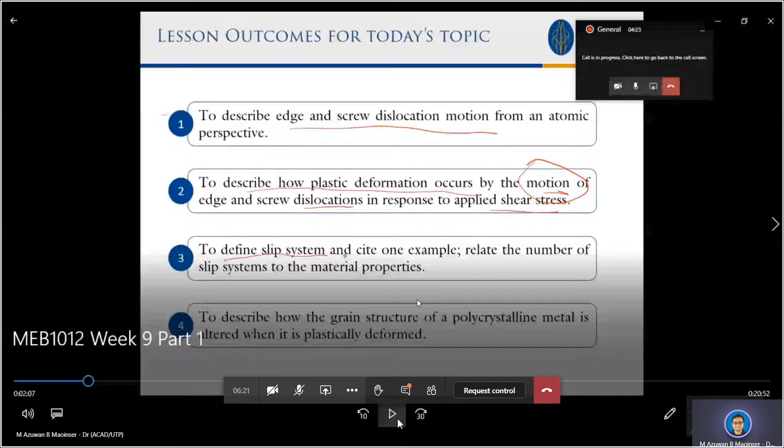Alright, okay, thank you Doctor. I hope to achieve by the end of this slide, the end of this slot basically.

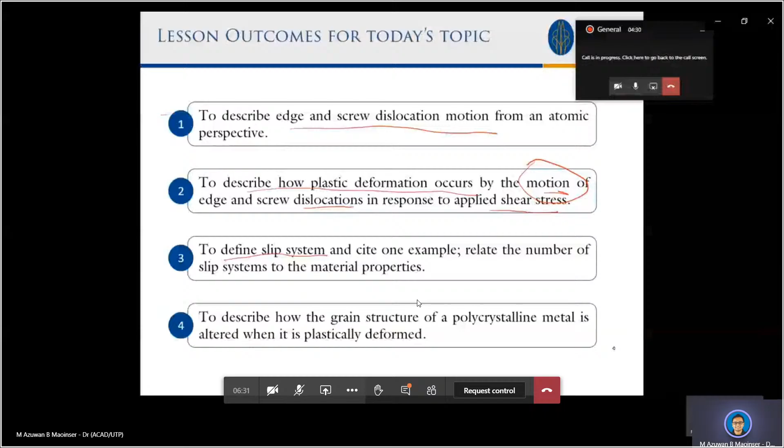Over here what I want to show you is how dislocations affect the tensile strength of metals, because we need to understand how metals deform.

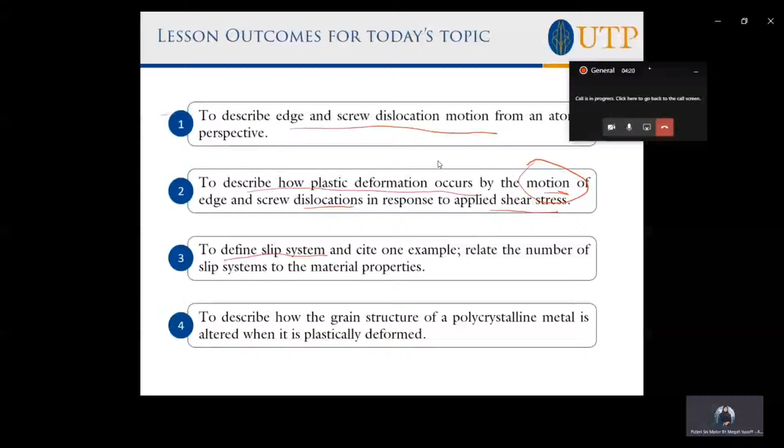Before I proceed, let me recap the expectations for today's slot. This chapter is quite big, but in this slot I'd like to touch on three things: edge and screw dislocation motion from an atomic perspective, describing how plastic deformation occurs by the motion of dislocations in response to applied shear stress—the key word here is motion—and then slip systems: what they are, what they consist of, with examples relating to material properties. Those are the three outcomes I hope to achieve by the end of this slot.

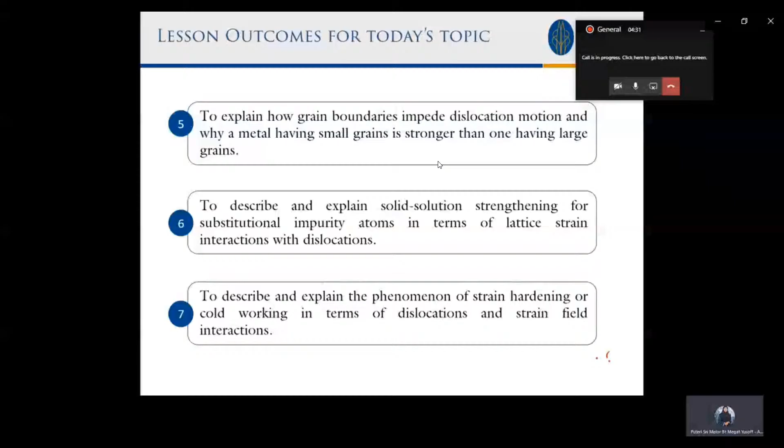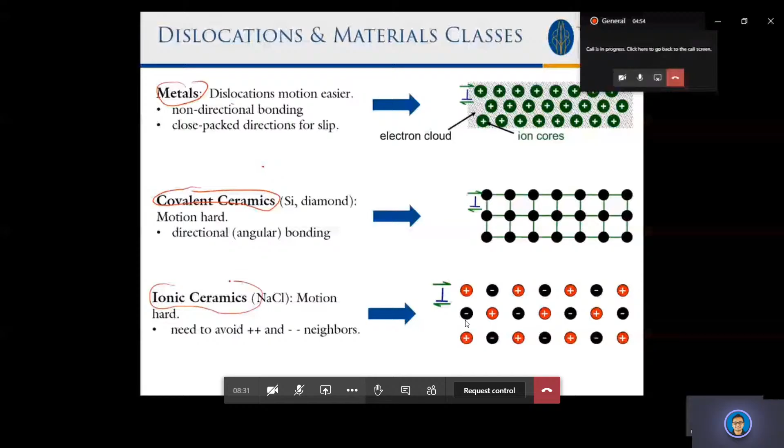Now what I want to show you is how dislocations move in metals compared to covalent ceramics and ionic ceramics. You know metals bond by metallic bonding, and this bonding is non-directional—there's no restriction to where the nucleus sits or where the electron cloud sits. Basically they are free flowing inside the material.

For covalent ceramics, things bonded covalently, you know covalent bonding is directional. The arrangement of atoms, how they sit with respect to each other, depends on how many atoms are sharing electrons with the material. So covalent bonding is directional—there's an angular direction for how the molecules can arrange themselves.

For ionic materials, the condition is that you have different charges, so you need to maintain charge neutrality, otherwise your material will be charged. If it's a neutral material, then whatever you do to it, it has to maintain that neutrality.

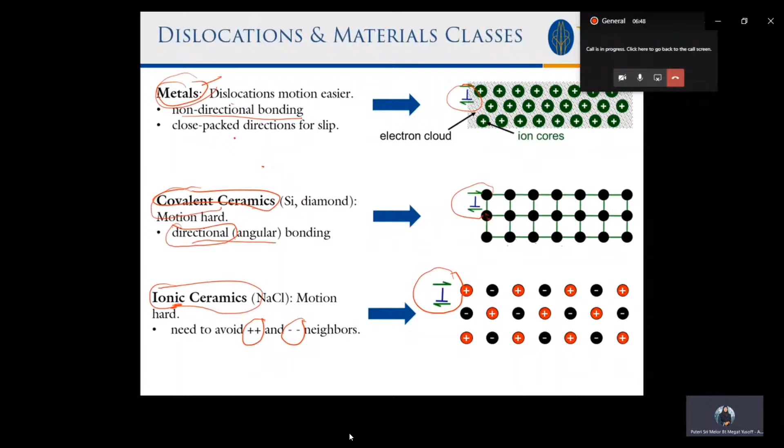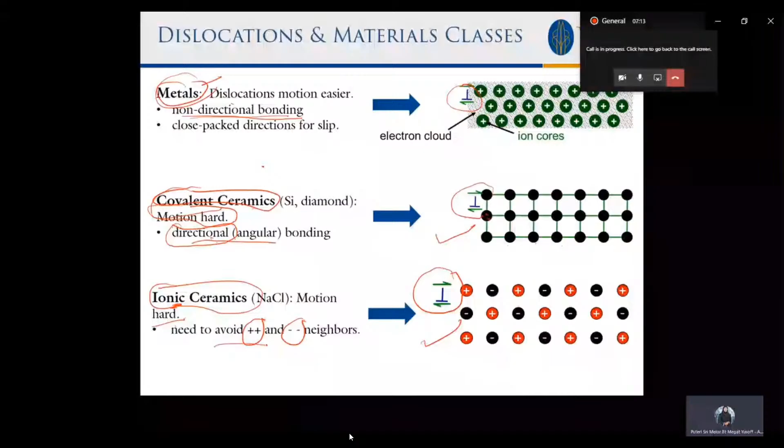For dislocation motion, your edge dislocation and screw dislocation can move—you already know this from chapter 4. The movement is much easier in metals because there are no restrictions on bonding, no direction, no charges to maintain neutrality. But the motion is harder in covalently bonded and ionically bonded materials due to the nature of the bonding—either directional or due to charges. So this affects the motion of your dislocation.

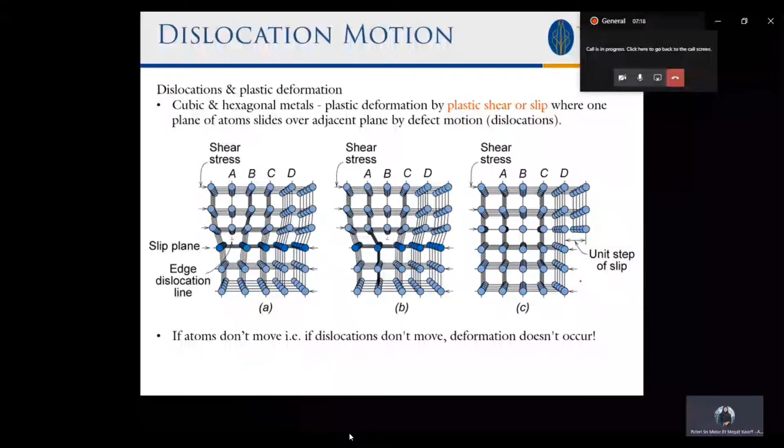Let me illustrate how the movement of an edge dislocation occurs. You have an edge dislocation here at location A, and with the application of shear stress—on one side pointing to the right, on the bottom side pointing to the left—this stress causes the edge dislocation to move one atomic spacing to location B.

What happened is that these bonds are broken and they bond to the new set of half planes there, so that it becomes connected. You see, the bottom part now connected to the upper part of A, and the edge dislocation has moved position to location B. This process continues on, whereby bonds will be broken and will form new bonds with this new edge dislocation. So now it's connected to this bottom one, and this will continue propagating, breaking the next bonds, until the end, when your extra half plane ends at the end of your crystalline block. So this is how dislocations move.

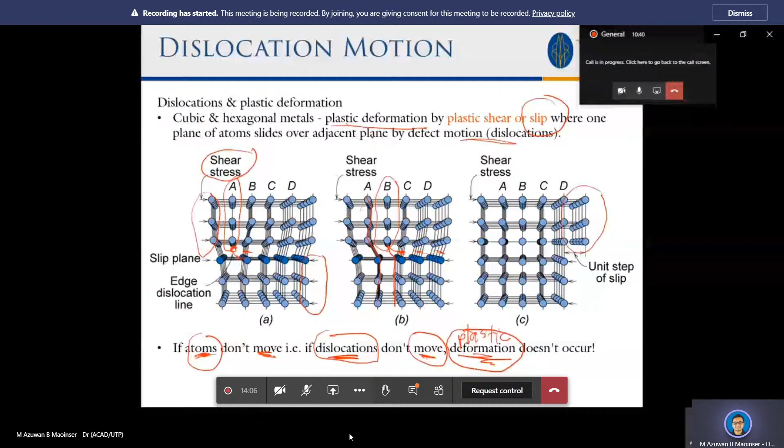Here it shows, in schematic manner, a different view about the dislocation motion. Once the dislocation moves, you must see that the movement takes place over a slip plane, over some plane, and in some direction. So we call this slip plane and slip direction. Together they form what we call a slip system. What is a slip system? A slip system consists of a slip plane and slip direction. The slip plane is the plane over which the slip happens, or the movement of the dislocation happens. And the slip direction is the direction over which the dislocation moves.

So let's see what happened in edge dislocation. You have this extra half plane on top. There's no extra half plane below, right? It's not connected to the atom below. So you've got edge dislocation here, and the direction is shown here. The shear stress is applied, one in the right direction and this one in the left direction. So if you imagine pulling this block in two opposite directions, you're only going to cause this edge dislocation to move.

What happened is it will just move in that direction, and at the end of it you're going to have a new shape of your block. Now you've got an extra part over there. Initially, there's nothing here, and now it comes out at the end. So this is permanent deformation.

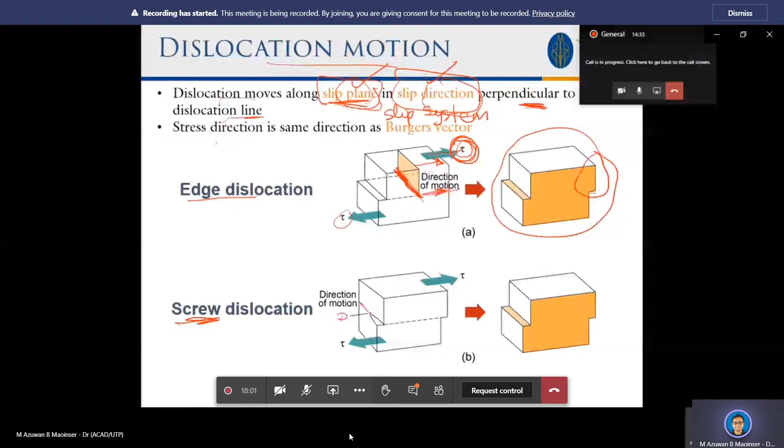But it's a little bit different in screw dislocation. This is where you have your screw dislocation, with a displacement of the atoms, as shown here. But when you apply your shear stress, what happens is you can imagine this going to tear to the back.

It's going to tear off until the back, right? So at the end of it, you're going to have one step like this in the crystalline structure, in the crystalline block. You got permanent deformation over here.

So in this case, what happened is that the dislocation line, where is the dislocation line? The dislocation line extends here. Remember your screw, the screw dislocation. Along this line, all the atoms are misaligned. So this dislocation line now is parallel to your shear stress.

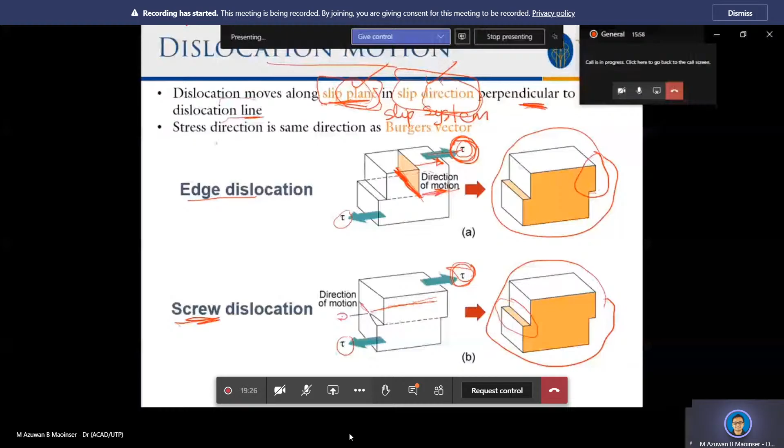But the movement or direction of motion of the dislocation is perpendicular to the dislocation line. It's just that the direction with shear stress is different from here. So that's what it's all about the dislocation motion. They can move. Dislocation can move with the application of stress.

So over here we want to talk a little bit more about slip system. Just now I said slip system consists of a slip plane and slip direction. So it cannot happen on just any plane or any direction, right?

The plane over which slip happens, or over which dislocation moves, is the plane with highest planar density, the ones that have the highest arrangement of atoms, lots of atoms sitting on that plane. So that would be the probable plane for the slip to happen. And in terms of direction, it also happens in the highest linear density direction, meaning that direction is fully packed with atoms.

So you might feel that, why is it so? It's because if I have a direction going that way, where atoms are touching each other, it is fully packed or close packed, so it's easy to move one atom to another place and another place. If it is empty there, then if I want to move this, it just gets stuck in this hole, so it just remains there.

So it's fixed. In BCC, the combination is between 110 and 111 direction, 211 and 111, 321 and 111. You can check it out. But we are already telling you that there are 48 systems, so you can play around and see whether these are all the fully packed highest density planes and highest density direction, but there it is.

You got 12 slip systems for FCC, 48 slip systems in BCC. So it's all prescribed, already predetermined because of this condition. We already know that it only happens over the most dense plane and most dense direction. That is the reason.

However, comparing FCC with BCC, which one would be easier to deform? Which one is softer? Normally it's easier to deform in FCC compared to BCC, although they have many possible slip systems, because the amount of stress required for this 48 system to operate is high.

Although in FCC you only have 12 slip systems, the critical resolved shear stress, or the stress required for the dislocation to move, is much lower in FCC. We'll talk about that later, okay?

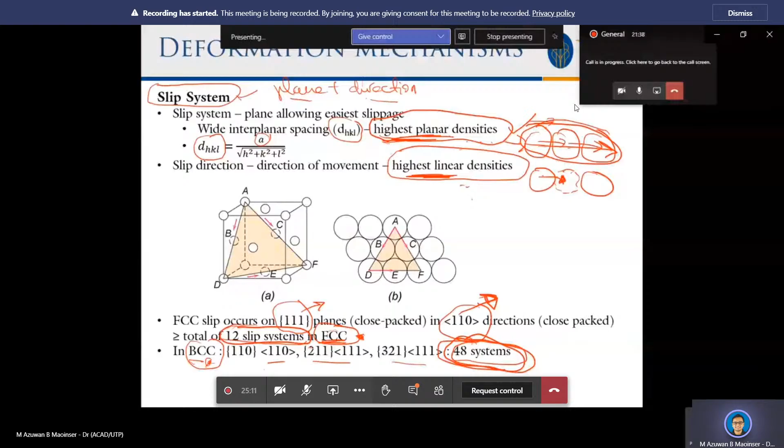So every plane will have three directions. So four planes times three directions, you got 12. So this is how you got 12 slip systems for FCC.

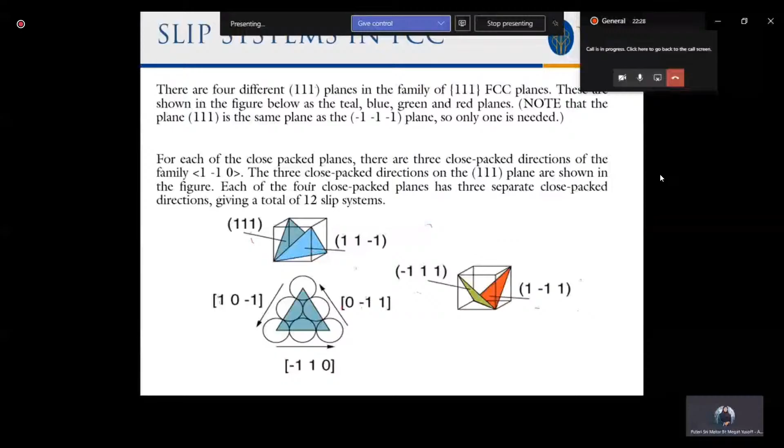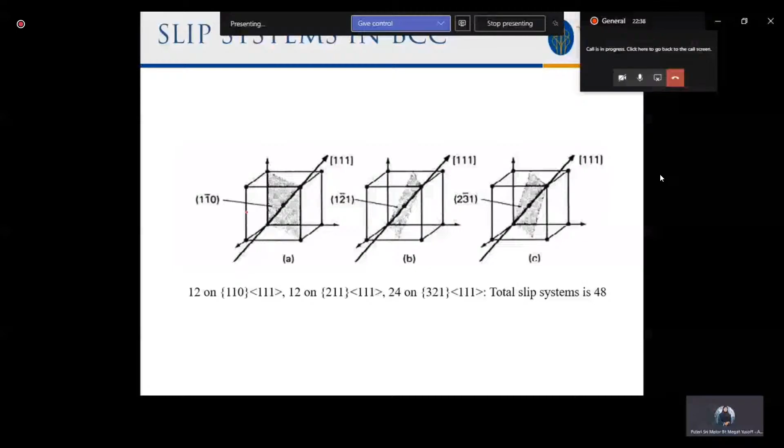Similarly for BCC, you can convince yourself that plane 1, negative 1, 0 has direction 111. Here you've got plane 1, negative 2, 1 also with direction 111. So normally in BCC, the highest density direction is 111. We fixed that, that one is already known, so it's not changing. Only the most packed crystalline planar density is changing.

So when you count this, 12, 12, and 24, you get 48. You can try to do that and check whether what I say is correct, but I'm telling you it's 48. All right, so that's all at the moment.

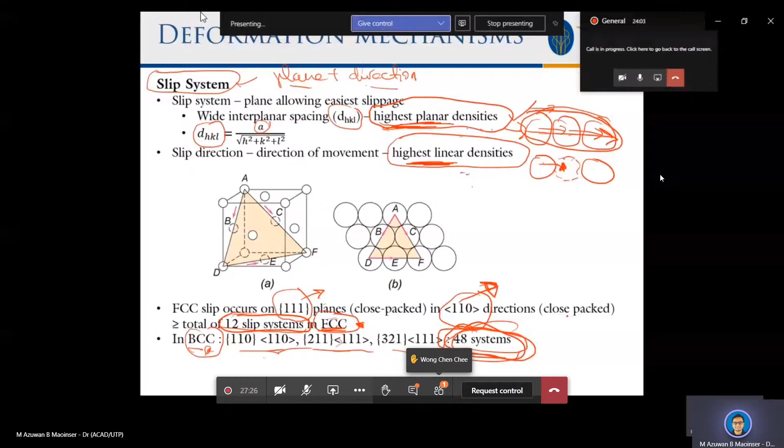This is just to introduce the concept that dislocations move with the application of stress, and the concept of slip system, which is a combination of slip plane and slip direction. You need to know that in FCC there are 12 different slip systems, occurring over 111 planes and direction 110, while for BCC it happens on these types of combinations with 48 systems. That is what you need to know at this point.

After this we will continue our discussion about dislocation. We are going to analyze the dislocation motion a little further, whereby we want to know what stress is required in order to make the slip happen. So, crystal slip due to a resolved shear stress. We want to understand how much stress is required to cause that slip, but that will be for the next lecture, in the next slot.

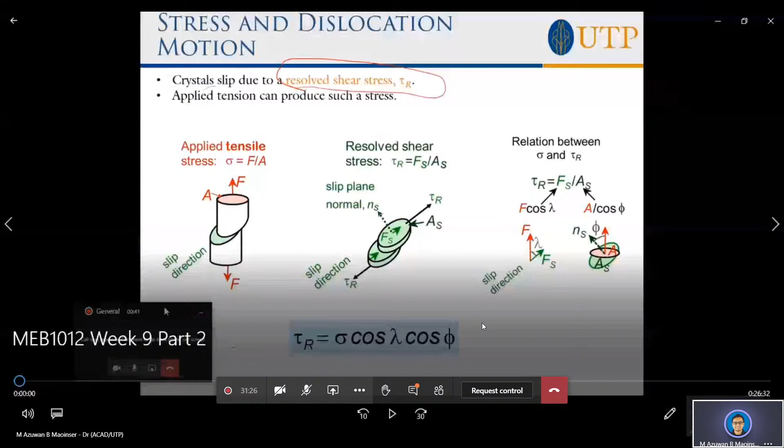Now about our topic on dislocations and strengthening mechanisms. In the last lecture we were talking about slip systems. By now you should understand that when slip happens, it happens on a slip plane and in a slip direction. Those two, plane and direction, combine as a slip system. It does not happen on just any plane or direction, but only on the highest packed plane and the highest packed direction, that is, the highest linear density and highest planar density. So we gathered that for FCC we have 12 different slip systems, while in BCC we have 48. That's just a recap from the last lecture.

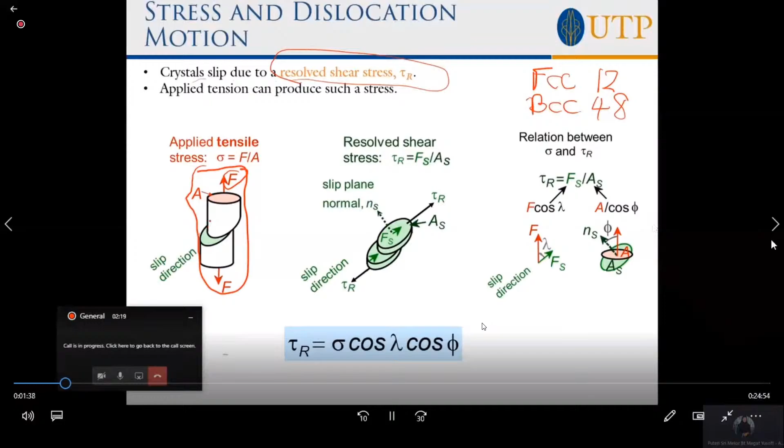So what we're going to continue now is to analyze our situation where we have our specimen, and then we apply force. This force can be translated into shear force or shear stress. We take a cylindrical specimen with cross-sectional area A, and we say that this is the direction of the slip. So this is the slip plane, and that's the direction of slip, the direction either way.

So when I want to analyze this, because I want to know how much stress is required for slip to happen, I just bring out the slip plane, this is the slip disk basically, one plane and another one. Now when we analyze this, we have to translate this F and A onto this slip plane. The resolved component of F now becomes Fs, the force on the slip plane. Then we have the area on the slip plane, and then we have the normal to the slip plane.

We define all these things, and then we have shear stress. This is called the resolved shear stress, in the direction of the slip, because the slip happens due to this component, basically the resolved shear stress from the applied normal stress.

Having all those details about our specimen, we know that resolved shear stress is equivalent to Fs over As. This is just force over area, but we need to take the area on the slip plane, not the normal area, but the perpendicular area to the applied force. So this is the component of area on the slip plane, the area of the slip plane.

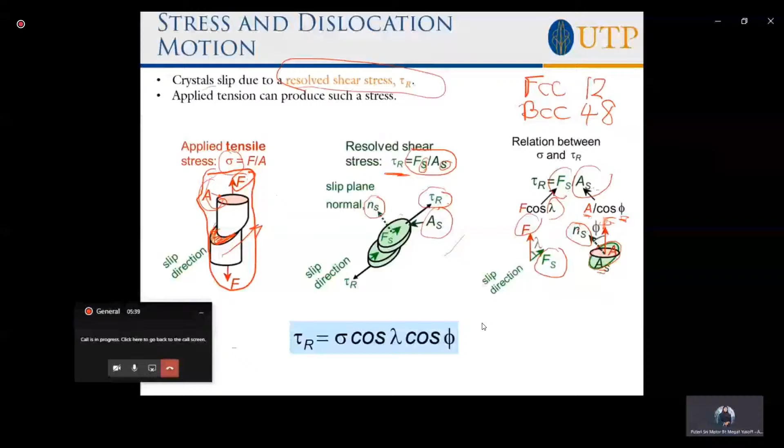So that is normal to the slip plane. Your slip plane is the green one, that's the area As. The normal to this green plane is Ns. So you get this relationship - you can work it out, I'm sure this is just simple mathematics with some theorem.

When you replace that into this equation, you get this big equation, a very important equation in this chapter. It says that the resolved shear stress, the shear stress acting on the slip plane in the slip direction, is equivalent to the applied force, F over A, multiplied by a factor cosine lambda cosine phi. Lambda is the angle between the applied force or stress and the force on that slip direction, and phi is the angle between the applied force and the normal to the slip plane.

So that is the relationship between the resolved shear stress that you experience on the slip plane and the applied force sigma, by the factor of cosine lambda and cosine phi.

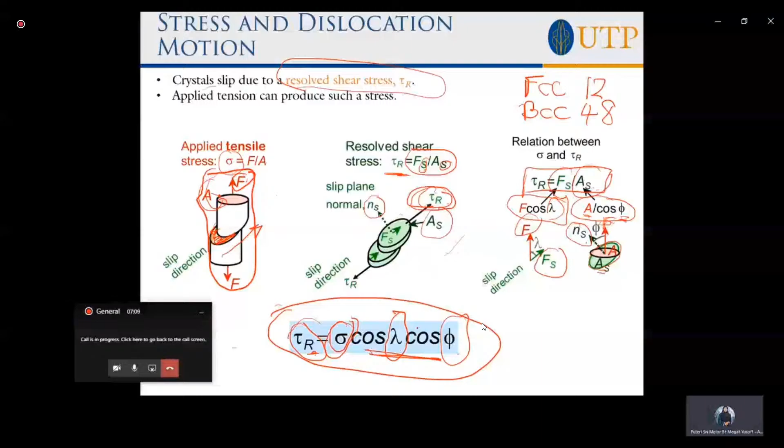Now let's look at that equation a little bit more. This resolved shear stress has to be greater than the critical resolved shear stress for slip to happen - that's the condition for dislocation motion. It must overcome a minimum value, then only it will slip. We call it CRSS, critical resolved shear stress. The typical value will be around 10 to minus 4 gigapascal to 10 to minus 2 gigapascal. Later we'll see how you find out what is the tau CRSS for each material.

Now just have a look at this equation, we want to analyze the extremes. Let's say you have a specimen, you apply sigma, F over A. If your slip plane is perpendicular to the applied force, will you get slip? If the angle between the applied force and the slip direction is 90 degrees, lambda equals 90, cosine lambda is 0. So when cosine lambda becomes 0, tau resolved becomes 0. If it's 0, then you have no energy to slip, so no slip in this case.

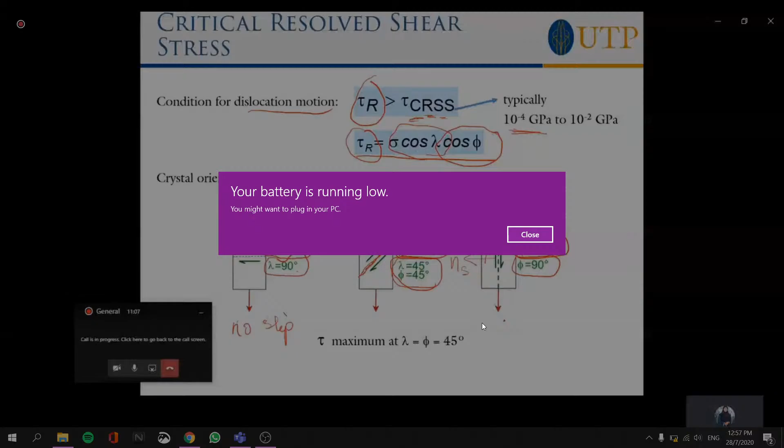So in that case, when you get this situation, tau r becomes maximum, right? That is sigma divided by 2. Betul ke? I've had this for a long time. Cosine 45 is 1 over square root 2.

So your cosine would start from here. Okay, so that's 1, that's negative 1, and that's 0, right? So I think you can get that. So this is the situation. You must realize this, the extreme.

The maximum tau r would happen when the two angles are 45 degrees, and that will give you half of the applied force. So half of the stress would be acting on that slip plane. It will slip because it's already maximum.

So what happened here? What we show you here is about the single crystal. How do they slip? A single crystal has all the orientations of the atoms in the same direction. If it is a cubic, and then the cubic is pointing along the same direction, no different direction, then it will slip like a step like this. This may be the 1,1,1 plane, and this one is also the 1,1,1 plane. Everything is 1,1,1 in the same direction. So this is how you observe slip in reality in a single crystal.

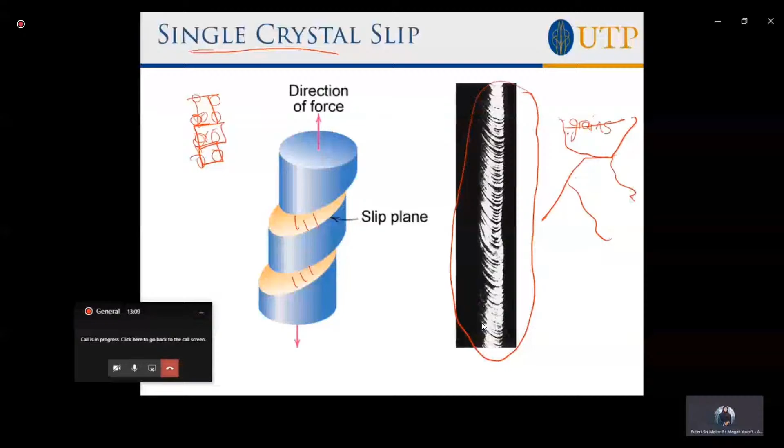So what happens if it is a multi-crystal, or you have a polycrystal? When you have a polycrystal, if you can remember, you have lots of grains. Each grain - these are all grains, kan, with the grain boundary and all. Each grain will have its own 1,1,1 direction. So maybe in this grain, the slip is in that direction. In this grain, the slip plane may be aligned in this other direction. In this grain, it may be along this line direction. And this one may be something like that.

So within a grain, it will behave as if it is a single crystal. But of course, it does not continue throughout the material because you have grain boundaries - it will stop at the grain boundaries. So you don't observe this single step of parallel steps like this in a polycrystal.

Okay, now let's observe some of the factors affecting slip motion. We're going to compare between FCC and BCC. For HCP, you just look at it - we are not going to deal with HCP because we didn't learn about that crystal structure anyway. So how about the critical resolved shear stress?

That is the minimum tau that you must achieve in order for the system to slip. So there must exist this minimum value. For FCC, the value is 50 to 100 psi, pounds per square inch. But when you look at BCC, it is 5,000 to 10,000 psi. Such a huge difference in terms of the minimum shear stress required for slip to happen. So this is the minimum for slip.

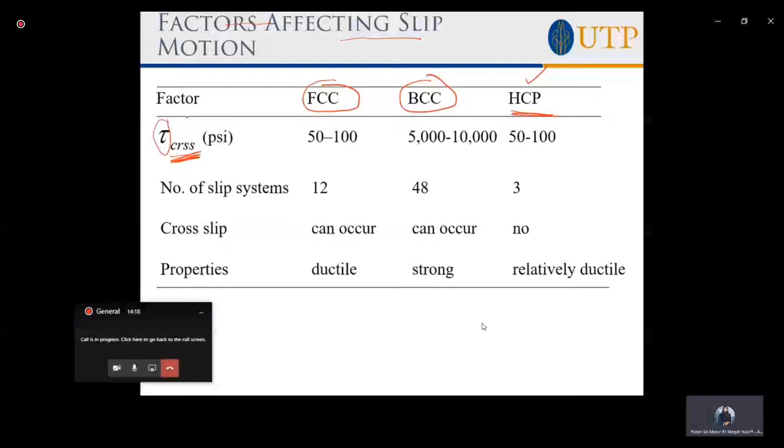Now, the number of slip systems in FCC is only 12, but BCC has lots, like 48. But it doesn't matter, because even though BCC has more, if the value required for slip is so high - the shear stress required is too high - then the material becomes stronger, because it's difficult to move the dislocation. You cannot cause slip to happen easily. You need to reach this value before it can slip. Therefore, your material becomes stronger than FCC.

Because in FCC, although you only have 12 operating slip systems, the value of tau CRSS is rather small, so many slips can happen although it's just within 12 systems. That is good enough, making it a ductile material. So any FCC material would be ductile, and any BCC material becomes very strong on the basis of this slip motion - because when we talk about ductile versus strong, we're talking about high strength.

It is about how they resist the application of load, about stress. This is the explanation why FCC materials become ductile. You can explain it in terms of the lower tau CRSS that they experience, although their slip system is not as many as in BCC.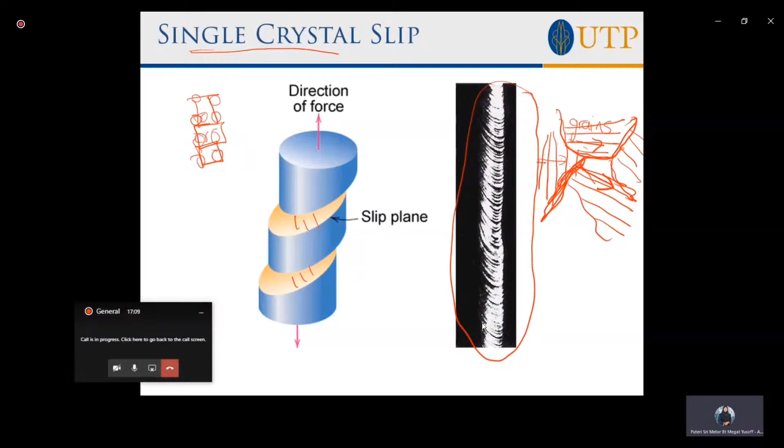Cross slip means you change direction. When you slip, just like in the polycrystalline, let's say you slip over here, you move into that direction, and suddenly you face a grain boundary. So what do you do? You can cross slip, you change direction and move in another direction. If you hit another boundary, it will continue in a different direction. So that's what we call cross slip, jumping into another boundary. For FCC it can happen, for BCC it can happen, so you cannot compare. But for HCP, no. So not all crystalline structures allow cross slip.

Okay, now let's have a look at one example and see whether it makes sense to you. The question is that you are given this situation where you have a single crystal. When we have a question, it's normally about single crystal because it's more complicated if we analyze polycrystalline. So we limit our discussion to single crystal, but you can imagine your single crystal sits within many different polycrystalline too. Every single grain can be analyzed as a single crystal.

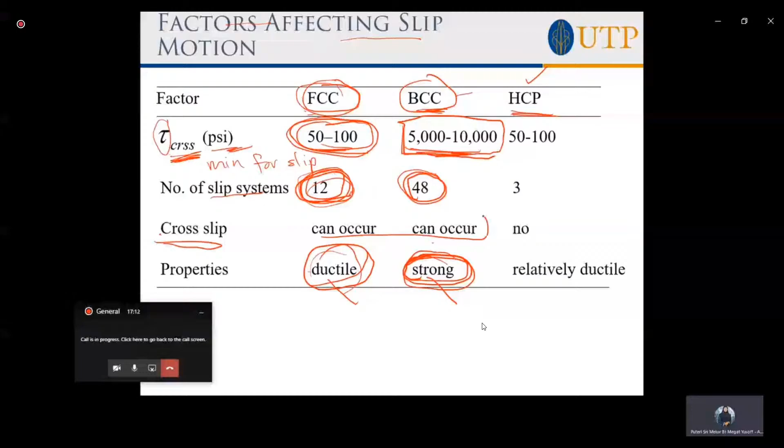Now, with this kind of loading, F, sigma is given as 6,500 psi. The angle of phi is given, the angle of lambda is given. Remember, don't switch these two together. Lambda is the angle between the applied force and the slip direction. And phi is the angle between the applied force and the normal to the slip plane. Don't get that confused, because once you get that confused, everything else will become wrong.

So with this kind of schematic, the direction of the applied force is given, will the single crystal yield? That's the question. You must be able to analyze this situation and tell us whether yielding will happen. What does yielding mean? On your stress and strain curve, when you pull, yielding is the point where you start your plastic deformation, sigma yield. So we always refer to the region where you start to deform plastically as sigma yield. This is what we are referring to here. Will the crystal yield? Will the crystal slip? Will the crystal plastically deform? So many terms we can use, but you must understand, when it yields, that means it is going into plastic deformation. When it yields, that means it slips.

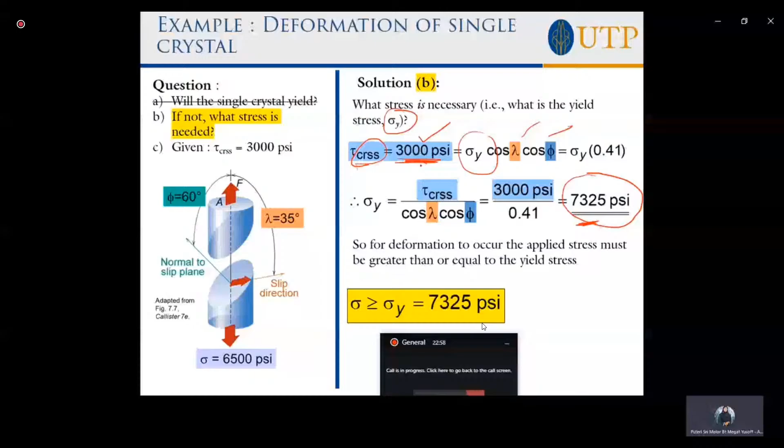If the material has that value of sigma yield, then only it can cause deformation. I think that's not too difficult to understand, but this is a good example to demonstrate whether you understand the concept of the slip system, the concept of critical resolved shear stress. And this big equation I mentioned to you has a name. This is called

Schmid's law. That's what we call it, Schmid's law. I hope I spelled it right. So these two things, cosine lambda and cosine phi, are called the Schmid factor. Schmid discovered this. So if you want to put your name on an equation, you need to discover new things now. So that's about deformation of a single crystal, where you apply Schmid's law in order to analyze the value of tau. You want tau to be as high as possible to ensure deformation happens.

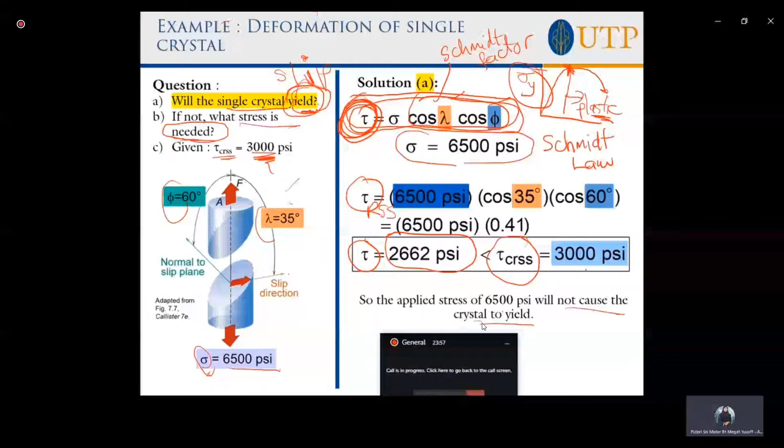This is what I mentioned just now about polycrystals. This is how you see the grains. You see one direction here, another direction, another direction. They all have different directions. So within one grain, that would be one single crystal. Here's one single crystal, here's another one, this one is a single crystal, and here also there's one single crystal, and so forth. So Schmid's law is applicable in this region by itself, here by itself, and separately.

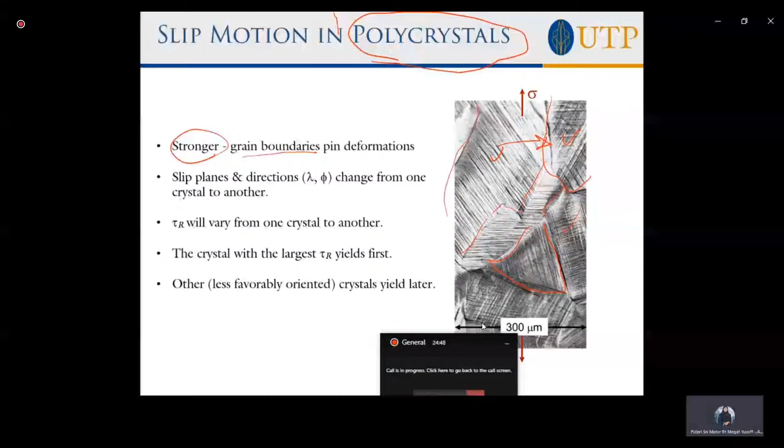So what happens in a polycrystal? It's very interesting because you have lots of grain boundaries, so it becomes stronger. When it faces the grain boundaries, it gets blocked. Although it can cross slip, you need more energy to cross slip. Therefore, overall your polycrystal becomes stronger because you have a lot more hindrances, lots more obstacles to stop the movement of the dislocation.

So basically understanding that movement of dislocation, I just put the symbol. Movement of dislocation will cause the material to be ductile, easy to deform. But if you block the movement, anything that blocks the motion of the dislocation, then you get a strong material. That's the concept, a very simple concept.

Now, because polycrystals have lots of single grains, they have their own slip planes and directions in each of these crystals, so it keeps changing. When you move from one to another, it keeps changing. Therefore, tau R will vary from one crystal to another. So this tau R here would be different from the tau R here because this value keeps changing.

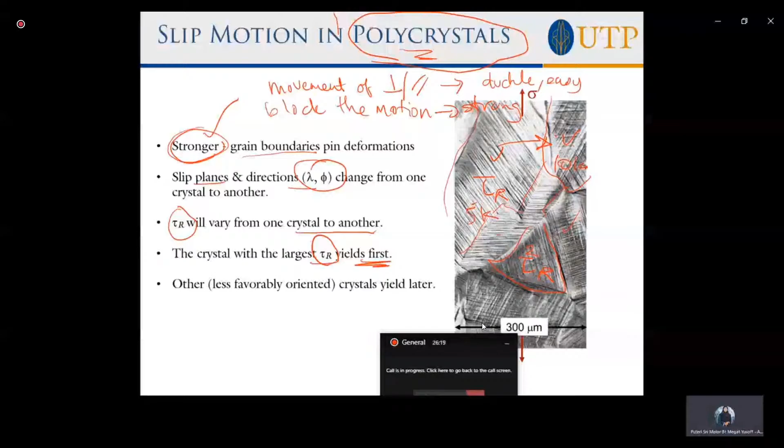The crystal with the largest tau R will yield first. So if here I got 5K, over here I got 10K, over here I got 2K, which one will yield? The highest one will yield first, the one with the highest resolved shear stress, because there's a lot of energy given to this crystal due to the orientation and so forth. So the slip will happen here first, then only the others would be activated. Others, less favorably oriented crystals, will yield later.

So that is the concept of Schmid's law, and I will stop here. This wraps up Schmid's law. You must know how to apply Schmid's law and solve problems related to this slip. That's it, thank you very much. I hope it makes sense to you. I'll see you in the next video, thank you so much.

Okay, we have already completed 2 parts, so I think some of the questions have been answered. Dennis asks, so if the shear stress is equivalent to CRSS shear stress, then it can yield, right, Doctor?

Yes, exactly. Someone asks why lambda plus phi is more than 90 degrees. All right, what do you understand about lambda here? What do you understand about phi here? As discussed earlier on, you need to check back. You need to understand well about lambda, you need to understand well about phi.

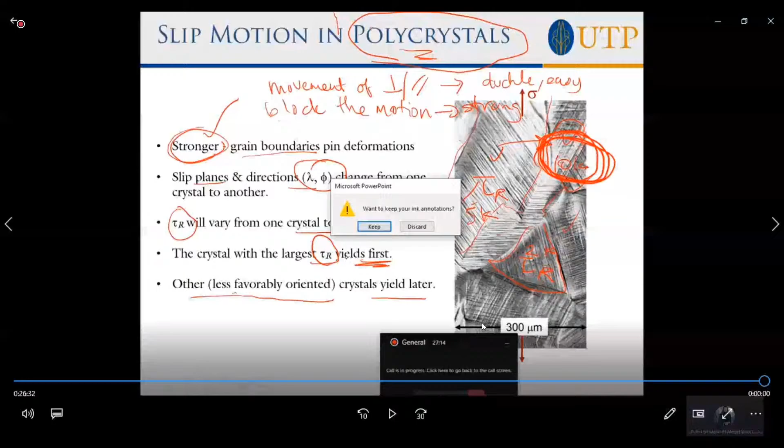It doesn't exactly have to be this particular case. What the question mentioned to you is 35 degrees and 60 degrees, so plus together it will be equivalent to more than 90. So it doesn't have to be that - it depends on the question given to you. Sometimes it can be less than 90, sometimes it can be more than 90.

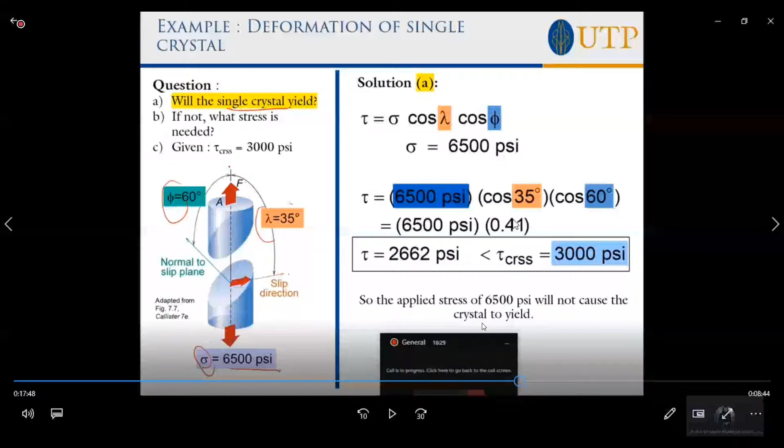All right, Wong? Okay. If you don't understand, it's okay, you keep that one first. We'll continue with the next part.

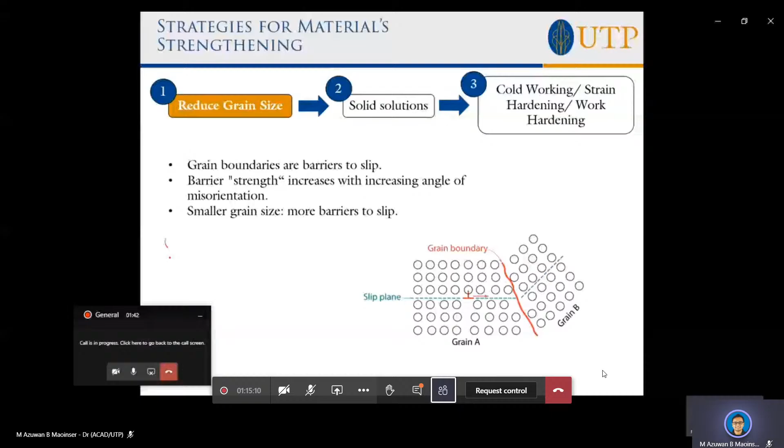About strategies for materials strengthening - just to recap again, the important concept about dislocation. We learned about that in chapter 4, but their motion is what is important in causing slip to happen.

And what is slip? Slip is permanent deformation. So when we say permanent deformation, what strikes in your mind? This is actually what we say plastic deformation. Different terms, different terminology, but you must understand what it is all about.

So in order to cause permanent deformation, I got to cause slip to happen. Slip is by dislocation motion, so when slip happens, it has to be on a certain plane and in a certain direction. So the idea is that if we want our material to deform easily, being ductile, being malleable, then you need to assist the dislocation motion - you have to make it easier for the dislocations to move.

But if you want to strengthen the material, what do you have to do? You have to block the motion - this motion has to be blocked or hindered, or you need to put obstacles to it. Anything that you can do to block or make it difficult for the dislocations to move means you're going to strengthen the materials.

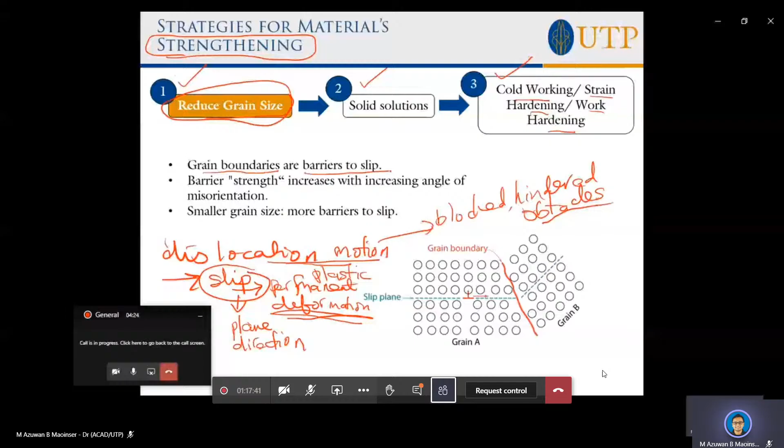So now the issue is to explain how reducing grain size can actually strengthen your materials. What we need to realize is that grain boundaries themselves serve as barriers to slip. You see, in this crystal structure, there's a grain boundary here. Why do I say there's a grain boundary? Because it separates the two sides - this one orientation is pointing that way, and this one is in a different orientation.

So you have two grains here with different orientation, grain A and grain B. They are still in the same material, they still have the same crystal structure, but the orientation is different.

So when you have grain boundaries, the more grain boundaries you have, that means you're going to impede the motion of your dislocation. Look at this dislocation trying to move through - it can move through this grain until it hits the grain boundary. It's going to face some difficulty there. If you don't give it enough stress, enough energy, it will not be able to cross slip and continue moving. So the grain boundary is going to give the obstacle, the barrier to slip.

So if you have small grains, you're going to have lots of grain boundaries, and that's going to be more barriers to slip. Therefore, it's good to have smaller grain size so that your material becomes stronger.

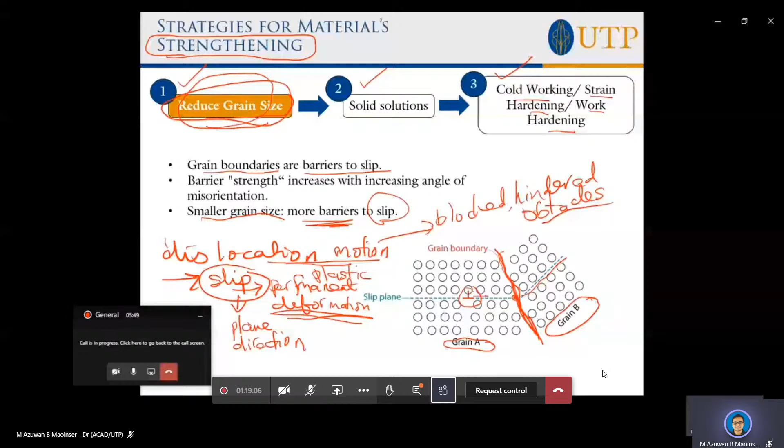Okay, that's one way. Another way, which we have seen basically, is to have solid solution. What is solid solution? Solid solution means you have foreign matters - you have different types of atoms inside your material. So you put in what we call maybe impurity atoms, or we can call it just foreign atoms. Impurity means something you don't want.

Foreign atom, maybe you intentionally put it inside the material, like having an alloy. So this solid solution is basically alloying - you put a new material, a new element inside your material. So this is what happens during alloying - that's why when you alloy things, your material becomes stronger.

What happens is actually it distorts - distorts means you change the dimension, the shape of your lattice. And by having that distortion, you also generate stress internally. So stress can produce a barrier to dislocation motion.

Of course, stress is like a barrier because it's not normal, it's not neutral - something is different inside your material. Let's see what happens if I have a small impurity somewhere inside. The atomic arrangement tends to shrink in, to move in, and that creates stresses around that area. These stresses pull inside, compressing the atom inside, so the surrounding atoms would be strained, pulled towards inside. So they have stresses around - what we call local stresses.

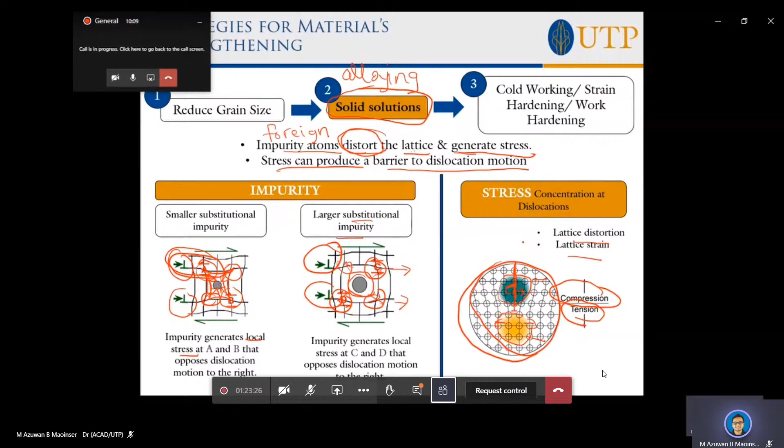So your lattice is no more neutral. Your lattice is under some stress - compression stress here, tension stress there. So it causes lattice distortion or lattice strain, and again it will impede the motion of the dislocation. This is what I mentioned just now about alloying.

This is just to demonstrate to you what happens if you have a smaller solute atom inside the host. So all these are the hosts. Now this one is small - because it's small, the surrounding atoms tend to pull in. That means they will be under strain, pressing onto the impurity or the foreign atom, the solute.

Because it's small, it's going to relieve some stress on top of that edge dislocation. Remember, here you have compression and below is tension. So what happens is your alloying element, your solute atom, because it's small, is going to partially cancel the compression stress experienced on top. So you're cancelling some stresses over here - here it's still under compression, compressing, but over here it's released because you've got this smaller atom there. So that's what we call partial cancellation of the impurity-dislocation lattice strain.

Although it's releasing the stress there, it's like a driving force, because over here there's compression, so your impurity likes to be here, your foreign atom likes to be here to cancel the stress on top. But still this is going to reduce the mobility of the dislocation, and hence you are increasing the strength.

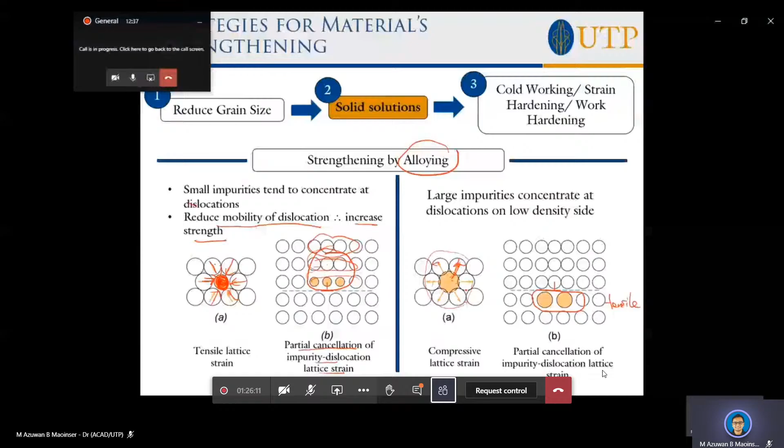So that's what we call partial cancellation of the impurity-dislocation lattice strain. And all this in effect is to reduce the mobility of the dislocation, and hence you increase the strength. Okay, all right.

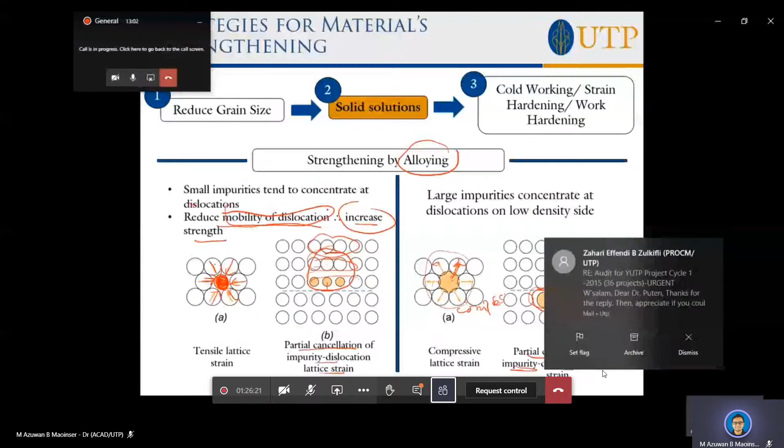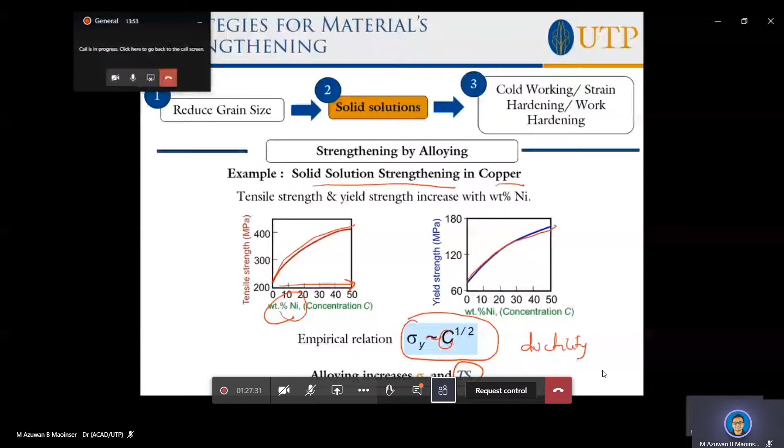Moving to the third method, strategies is about cold working, about strain hardening, about work hardening, all are talking about the same thing. What is happening here? This is a concept where metals become harder as they are plastically deformed. The more deformation you give to a material, the harder and stronger it becomes. That is the concept of cold working.

And when we say cold working, we are referring to room temperature. That means whatever we do - rolling, forging, extrusion, drawing - everything is happening at room temperature. Remember, we are dealing with metals, but still we are doing it at room temperature. Some metals have lower melting temperature and they can be cold worked. So you can do work onto the metal piece at room temperature, and hence we call it cold working.

But of course, you're going to change the microstructure, not necessarily damage it. Maybe sometimes you want to work on the metal. Common forming operations can change the cross-sectional area, including, as I mentioned earlier, forging.

What do you do? You have a mold, you put your blank, this is your metal blank, and then you close your mold, you put force, therefore your blank now has the shape of the mold. Rolling is just using rolls to change the diameter, to change the shape of your metal piece. And in drawing, you basically pull, you have tensile force, you pull your blank through the die that will take the shape of the die or the diameter that you set. And extrusion is something similar, but you push and you extrude.

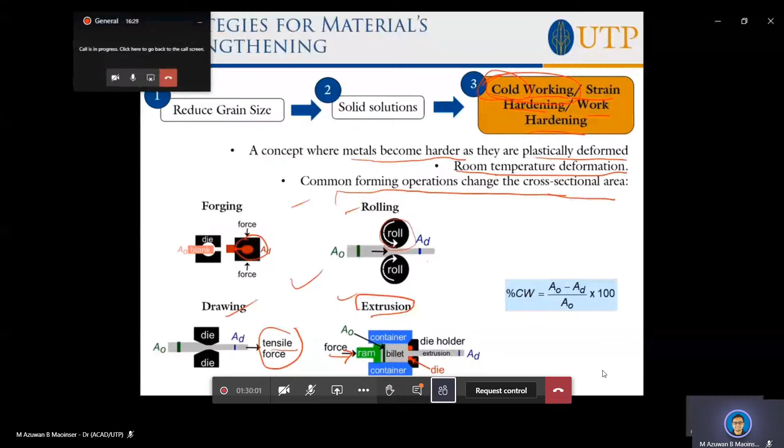We have this calculation of percentage of cold work. This will measure how much deformation you have made to the sample, and how much, I can say maybe dislocation, when you roll all this thing, you forge, of course you're gonna flatten the microstructure. All these are grains, right? And these grains will become damaged when you roll it, when you forge it, when you do work onto it. So this is going to affect the properties of the material.

And first, initially we need to calculate how much percentage of cold work we are giving to the material. That means how much damage, basically, how much dislocation we are installing inside the material. How do we measure that? We take the initial area minus the final, the deformed area, divided by the initial area. You can do this for area, for diameter, for length, for width, for height, whatever. You can follow any of these dimensions, and then you can count how much cold work you are putting inside the material as you work on it.

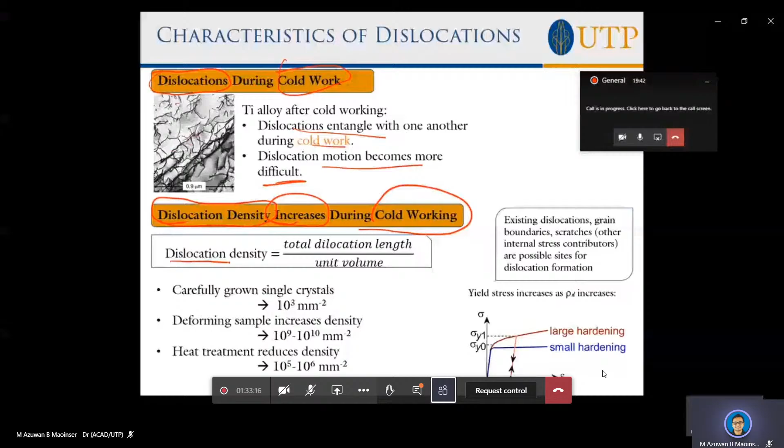That's the reason why we do cold work to a material, because we want to strengthen it. So what happened is that the dislocation density has increased during cold work. What is dislocation density? Again, the concept of density: total dislocation length divided by unit volume. This is 3D. If you add up all the length of dislocations divided by the volume, you get your dislocation density.

For a carefully grown single crystal, just for reference, the dislocation density can be as low as 10 to the power 3 per millimeter square, because the unit is length over volume, so you get per square area. Deforming the sample increases the density to 10 to the power 9 to 10 power 10.

If you do heat treatment, meaning you heat the sample up at a certain temperature for a certain time and then cool it down, what happens is that heat treatment can reduce the number of dislocations again, down to 10 to the power 5 or 6. So all these things are recyclable, in a cycle.

You can increase or decrease the dislocation density by doing the right thing. If you want to increase the density to increase the strength, you do cold work. If there's too much dislocation density inside, it becomes too hard, too strong, and brittle, so you want to reduce that by doing heat treatment. Engineers can do all these things. That's why we are here, we need to solve problems. Whatever people need, we come to their service.

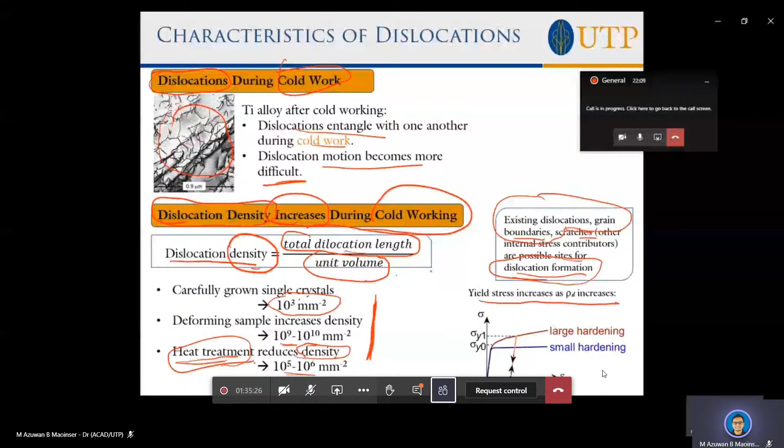So what happened to our yield stress? Yield stress increases as the density of dislocations increases, because the strength is increased. You see now you have a higher yield stress. This one is small hardening, this is large hardening. I hope you are following.

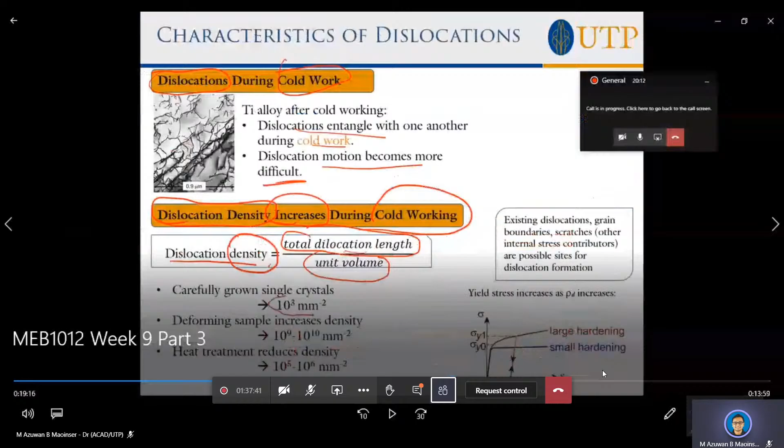So that's behavior of the dislocation. With the same orientation, compress and strain, the same direction here, of course this will repel. See, they work like an ion, like ion, like ion. Right, so they will repel. So this one you have repulsion. If they are on opposite, okay, one is compressed on top, one is compressed at the bottom. Okay, what happened? They will attract each other. Right, when they attract, they will cancel out, because one is compressed on top, one is compressed at the bottom. At the end, they come together and they cancel out. No more dislocation. Perfect crystal. Beautiful. All right, so they can interact. So that's behavior of the dislocation.

I suppose here we just do the impact of cold work, as I mentioned, we already mentioned this.

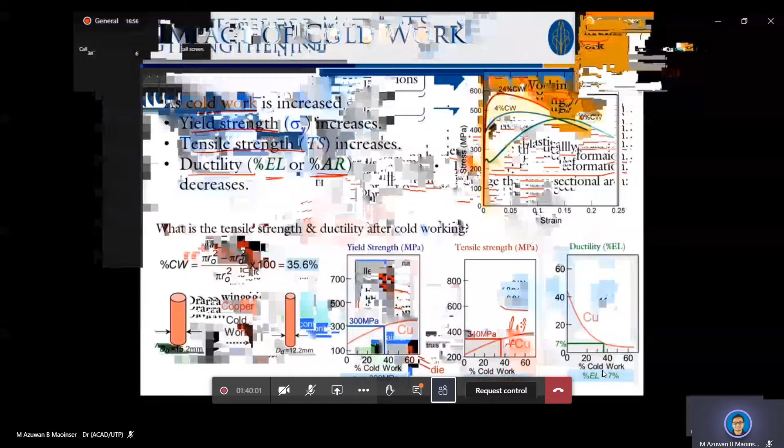So we already mentioned this. Just to recap in terms of this plot here, you can see a material with 4% cold work. The tensile stress-strain curve looks like here, this is 0, so it's lower. This is 4%. Now you put 24% cold work, even higher stress strain curve. So fantastic, it follows through with what we mentioned here.

What is the tensile strength and ductility after cold work? There is a plot of yield strength versus percent cold work, tensile strength versus cold work, and ductility versus cold work. This would be for a specific material - this is copper. So the question is, once I do cold work to the material, what is the level of cold work inside, and what is the strength and ductility?

So you use this formula for percent of cold work: you find the initial diameter, the final deformed diameter, divide by the initial diameter. Well, this isn't actually diameter, you take the area. Everything cancels out anyway, so this will cancel out.

So when you calculate that, you do cold work to copper from 15.2 millimeter diameter, you reduce it to 12.2. It becomes smaller because you do cold work - you do rolling on it, you do maybe drawing on it, forging, whatever process you do to it, it becomes smaller. So when you reduce the diameter, you calculate the percent of cold work, it seems that you have put 35.6% cold work.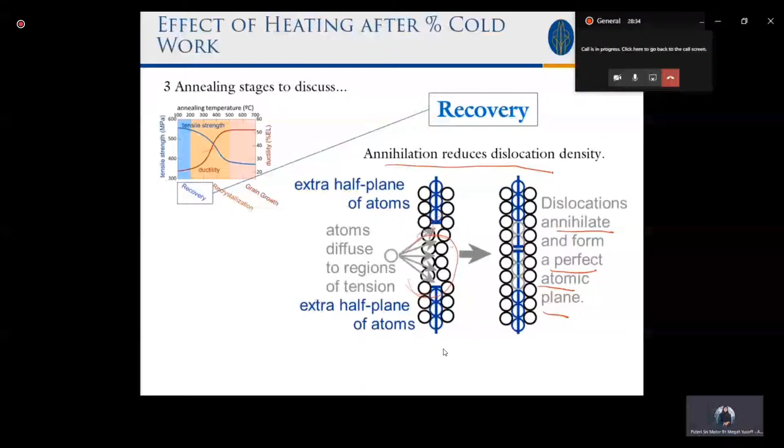Then you go into the stage of recrystallization, which happens at a higher temperature. What happens is you're going to remove all these cold work grains - all the dislocations, all the cold work grains will be removed. After that, you have this kind of outlook.

Okay, and after 8 seconds, now you are recrystallizing new crystals. All these are the old ones. So now you are creating new grains. All cold work grains are consumed. So initially 33% cold work brass.

It may look something like this, and then you start to create new crystals. When you start at 3 seconds, new crystals will come out, and at 4 seconds you got more crystal coming up. At the end of it, you got all new crystals. Okay, so that's what we do.

What happened actually during recrystallization? New grains are formed, have a small dislocation density, and they are small inside, and they consume all the cold work grains. So that's what happened.

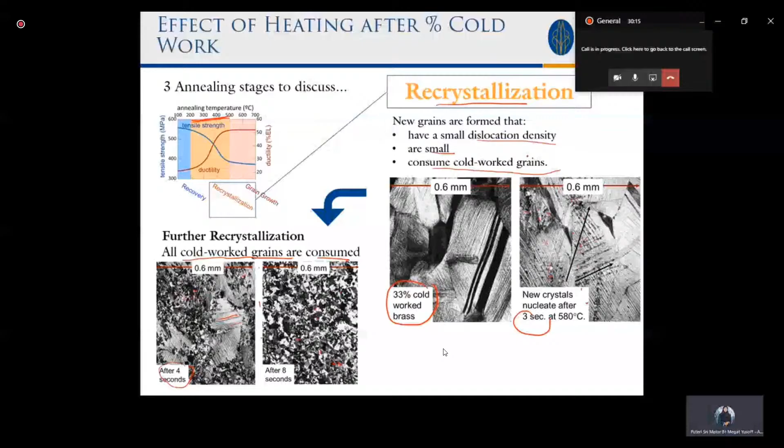And at the final stage of annealing, that is at higher temperature, 600 to 700, what happened? Your small crystals, the new grains that come out, tend to join each other because you are putting more temperature, heat, energy, and then you leave it for a certain time. So what happened is that now they become bigger grains. So larger grains consume the smaller ones.

Grain boundary area is reduced, so they need to be optimized. Energy needs to be optimized. So that's what happened in the third stage. The name is also grain growth. So now you got bigger grains compared to during the recrystallization.

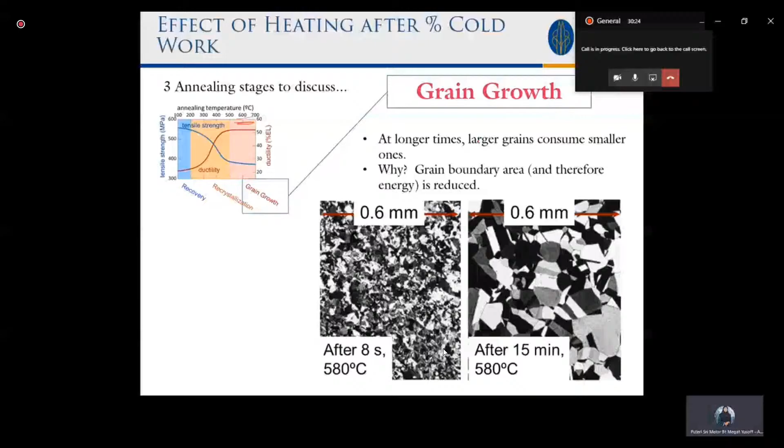And that temperature is actually between 0.3 to 0.6 of its melting temperature, so you never go beyond that TM. This happens due to diffusion, so annealing time and TR are related: shorter annealing time for higher TR. Atoms move by diffusion - the higher the temperature, the shorter your annealing time will be in order to achieve these big grains.

Higher cold work means you lower your recrystallization temperature. These are all the factors that affect the recrystallization temperature. Pure metals have lower TR due to dislocation motions being easier to move in pure metals, hence you get lower recrystallization temperature. So that makes sense.